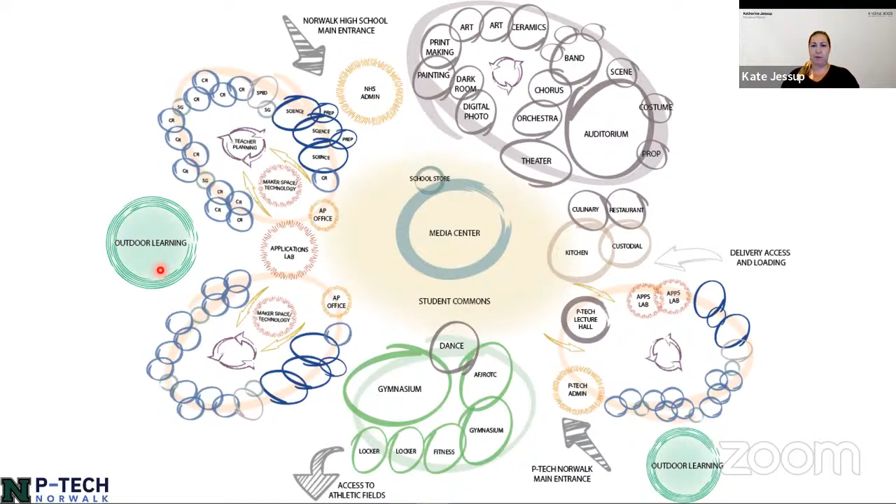We have two different distinctive administration areas that we wanted to maintain for the two separate schools. In between or adjacent to each school, we have outdoor learning areas which we're working into the plan. With COVID, we've found that students are going outside more. There's a desire for teachers to bring students outside to support that social-emotional piece. This roadmap served as how we would design the building for either of the two concepts.

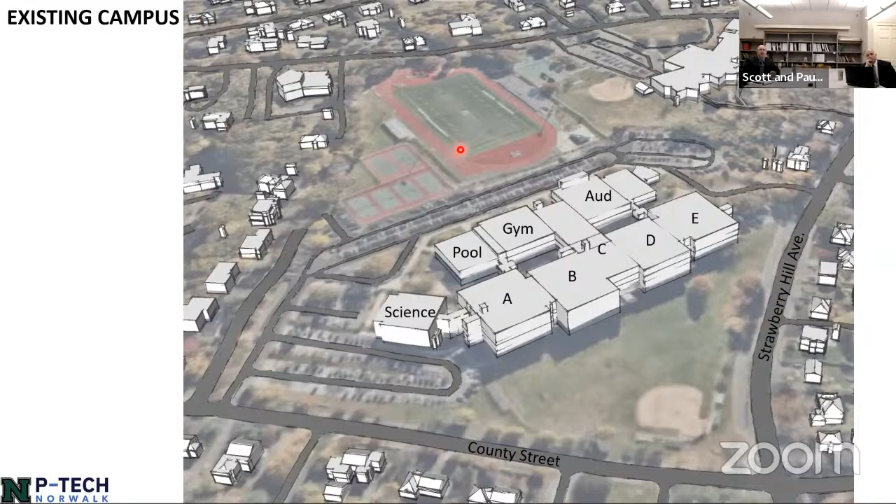We have the science wing over here, which Jim might have explained that needed to stay relative to what the state guidelines were. So we thought this was an opportunity to make this into the PTech, talking about the interdisciplinary teaching that Kate had talked about. And in the back here you have the auditorium, gymnasium, and pool, and farther back you have the track and field and tennis courts.

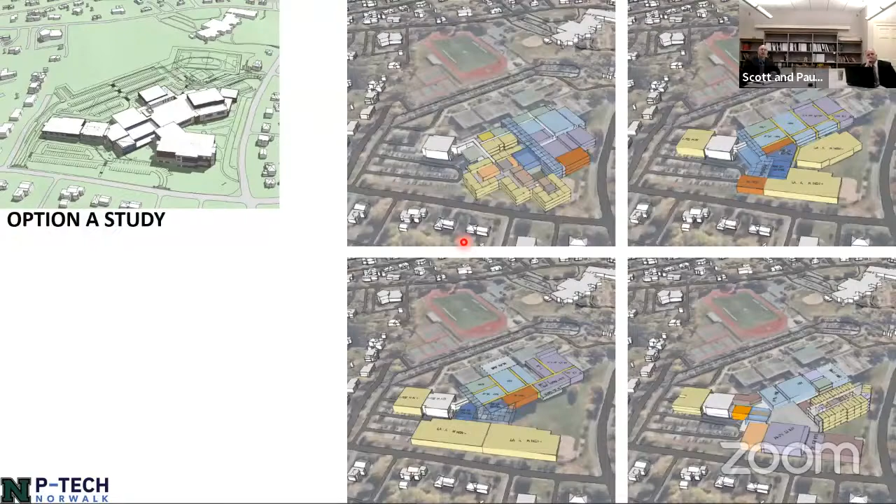Through the design process it was clear that the only place to really construct a building was the softball field. So that was the first thing we needed to do, design everything around the softball field and see what we could fit on it. We went through several design options and ended up with one that limited the footprint and gave back a little more land, and Kate was talking about the outdoor areas to try to get a little bit of clearing and land use for students rather than buildings.

This concept we have for Option A is a 4-story structure, classroom wing for the Norwalk High School students. As I mentioned before, you have the PTech renovation of the science wing and a PTech addition. You also have, going with Kate's diagram, everything around the central core where you have the commons, the media center, and the cafeteria. You also have the support spaces being the gymnasium, auditorium, performing arts, and athletics.

What we have here is Strawberry Hill on the right and County Street on the bottom. There was a lot of site restrictions with this site. It's not necessarily a big site, so a lot of room is really taken up by the building, as you can see.

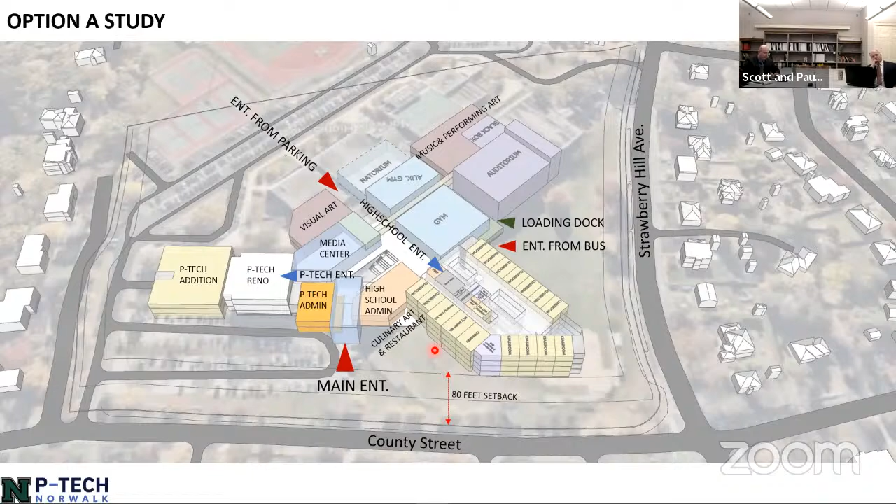Getting into the site, how we broke down our design was you had this 4-story structure at Norwalk High School at the intersection. We try to keep it open, as you can see, with green space on the west and east. If you're familiar with Norwalk High School, you have a bus drop-off that would be maintained in Option A, and then students would flow into the building on the west side. For the administration, we added a new curb cut on County Street to try to alleviate congestion on site and allow more opportunities for ingress.

So you have the administration and public coming into the main entry, generally into the cafeteria, and you can see the building is broken down into the PTech, and the pool, gymnasium, and auditorium. The displaced softball field is being replaced on the west side of the site with a synthetic field and multi-purpose field. The football field is untouched in this design, but the parking lot is reconfigured, also using the available access road to Strawberry Hill Avenue, and of course the County Street access continues to be maintained.

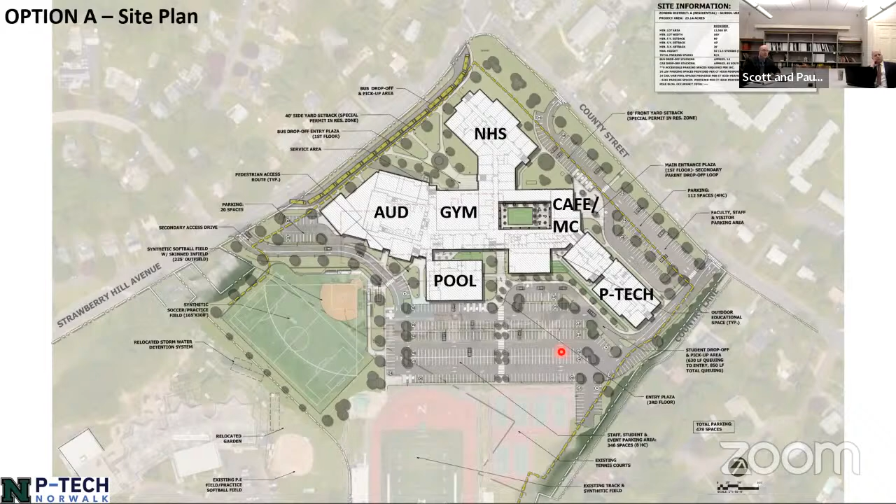Amar, if you want to go through the phasing for us.

Sure, thank you Scott. My name is Amar Shamas. I'm with Gilbane Building Company, the construction managers for the Norwalk High School project. Just a brief background, Gilbane has been involved with the project back when it was the Science Wing addition and the Orchestra addition, between 2003 and 2008. So we're very familiar with the project, the existing building, and the site.

As it relates to phasing for option A, our first plan is to construct the new 4-story Norwalk High School classroom wing. We'll establish our site perimeter around the area encompassed within that new building. The impact on the existing building area is that the existing softball field will be displaced, as well as the parking lot adjacent to the existing science wing, which will also be impacted by construction of this wing.

This is about an 18-month duration. Our goal is to start toward the end of spring into summer of next year and go for 18 months to complete that first part of the project. During this phase, the existing building's bus drop-off and parent drop-off stay generally the same, with no impact as it relates to this particular phase.

In phase 2, the impact will be much greater to the site. P-Tech will be underway as it relates to construction. Our laydown area is going to expand around that building, and that's about a 16-month duration for constructing and renovating the existing science wing to convert it into P-Tech.

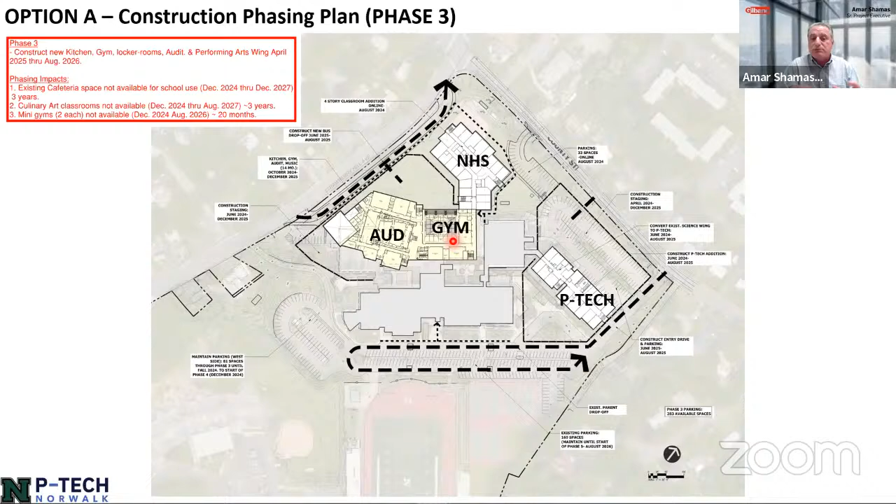In phase 4, we're going to be going after the remainder of the existing building demolition. There'll be the P-Tech from Norwalk High School in the gym area, and there'll be a disconnect right there. So we're going to have to install a temporary covered walkway in order to move students and faculty from P-Tech to the newly completed wings of the high school itself. This is about a 4 to 6 month duration of demolition.

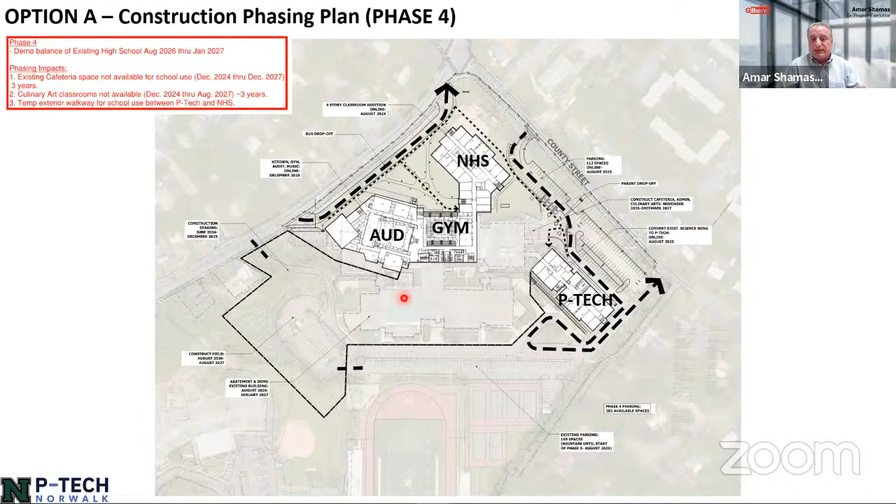At this point, in order to facilitate construction of the balance of the project, we move to phase 5, where we construct the last piece of the project: the cafeteria, the media center, and the pool area, if it can be afforded as an alternate. That process is about 16 to 18 months. So that's about another 16-month duration. With that, the overall duration for the project for option A is about 55 months, and it's about $191 million in construction cost.

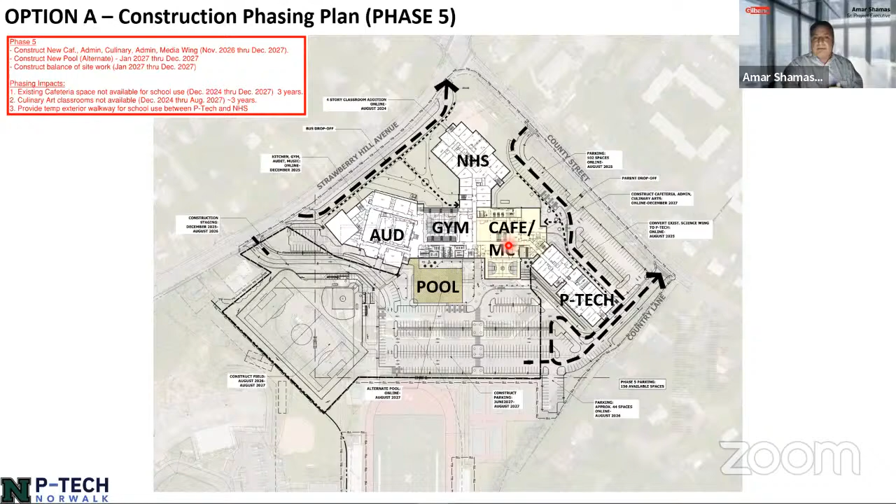Kate, if you want to weigh in a little bit about some of the swing space requirements as it relates to the project, option A. Yeah, absolutely, Amar. I think it's important, and perhaps Sandra and some of the educators can also chime in on this at some point, but there are some significant challenges that are going to happen for the educational space.

While all of these phases are occurring, there's essentially going to be points in time, which could be up to 18 months or even the entire duration of the project in some cases, where spaces are not going to be available at all, or they may be in temporary locations which are not ideal. Those include, as Amar mentioned, the media center and P-Tech in its entirety, which means essentially 500 students who would be impacted. The culinary program, which is also very expensive to put in a temporary location, the JROTC program will have a temporary location, the counseling and administrative areas for both schools, and the career center and visual arts, which would be in classroom spaces too small for their needs.

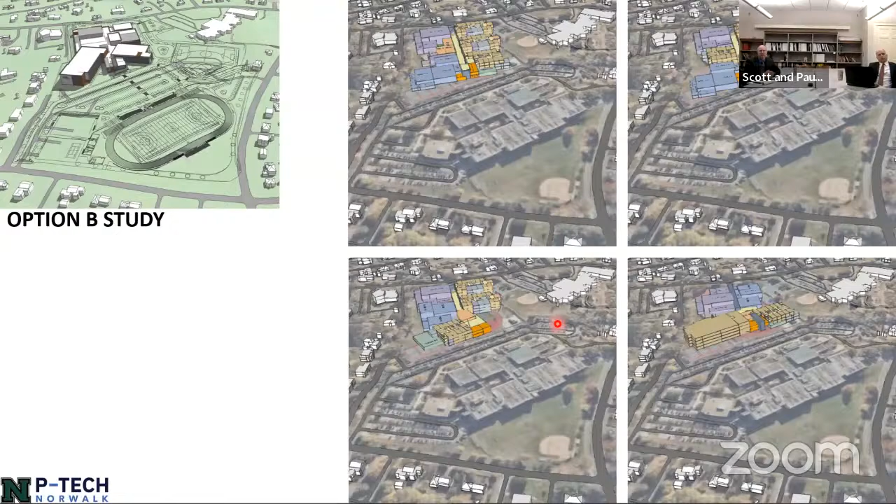Getting on to Option B, we were asked to study how we can put Norwalk High School and P-Tech Norwalk on the existing football field. Once again, we went through more iterations in the design because there was a greater opportunity to provide programs in different configurations, whereas in Option A we only had fewer opportunities.

What we ended up with is sort of an open arm concept where we have Norwalk High School on the right. It still manages to be a 4-story structure. We did try for 3 and 2 stories to see if those would work, but it was just taking up too much land. You have P-Tech on the left, and you still have that initial diagram where everything is centralized around the cafeteria, the commons area.

We also have the media center in a direct line with the core, bringing you back to the pool, auditorium, and gymnasium. The softball field and multi-purpose field is still in the same spot. We found that it was the best spot on the site for that, because the football and track needed the largest space available, so that was tucked in at the intersection of Strawberry and County streets.

Because it is tiered, you come out—generally this is flat up here—into the parking lot, and then you tier down about 30 feet to the football grounds. Off on the right, you have the 2 tennis courts that are tiered because of the grade, with ADA and site access to them.

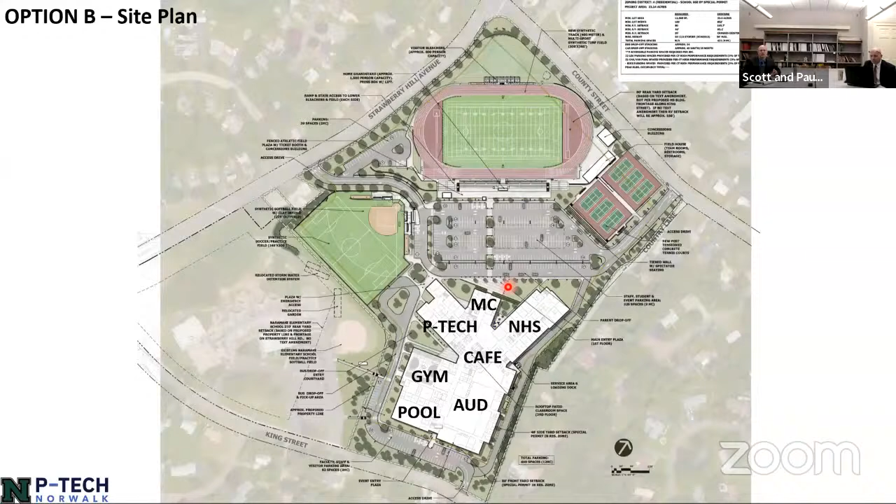We did add another curb cut on King Street, similar to what we did in the other design with County Street, to allow some alleviation of the congestion occurring on the existing site. Again, this is just a massing model.

Amar, if you wanted to say a little bit about the phasing. Sure, thank you Scott. Part of our charge during the design phases is to support the design team with phasing, constructability, and estimating. When we looked at this particular Option B, as it relates to phasing, it's a lot more straightforward.

It's effectively 2 phases: constructing the new building in one phase, which is about a 3-year duration. Once that's completed, the school will swing into the new building, and then we take over the existing building in its entirety. Instead of being in multiple phases, we basically put our construction fencing around the area, abate and demo the existing building away from the new building, and then construct the new parking lot, ball fields, and tennis courts. So again, it's effectively 2 phases.

As it relates to the overall duration for the project, it's about a 51-month duration. We anticipate starting in the fall of next year if this moves forward, and that will complete sometime around December 2027 to early 2028. So it's about a 51-month duration.

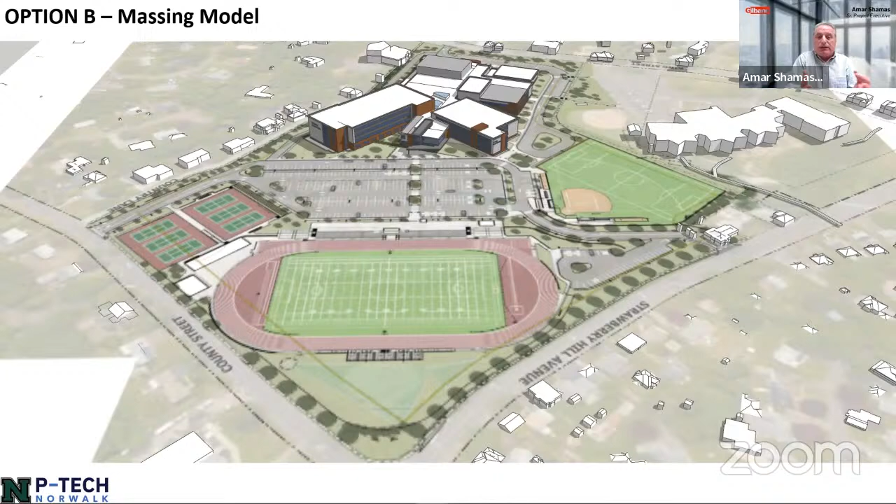The impacts here, effectively, there's no impact to the existing building at all. We're basically going to be constructing the new building adjacent to that, so that's a plus. The only area that will be impacted is the softball field area, which will be used for support spaces and lay down area. So again, the existing building functions as is, with no impacts during the total duration of construction of the new building.

The price, as it relates to construction costs for this particular option, is about $193 million, within 1% of Option A. And again, it's about a 51-month duration for construction. That's turning it over to you, Scott. Okay, Sandra, that's all we had for the presentation.